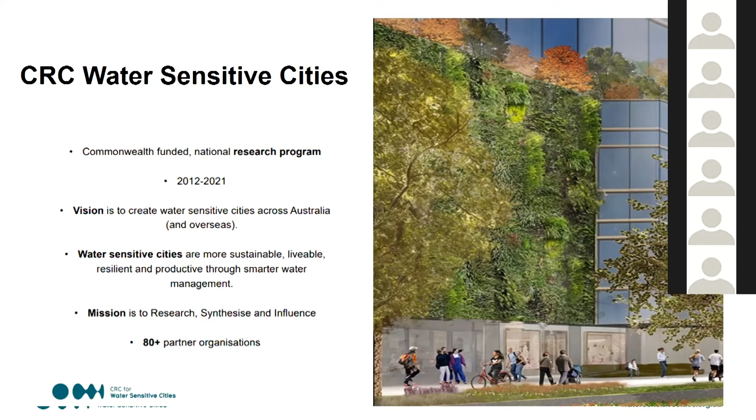Just very quickly, the first 4 or 5 years of the CRC was focused on 4 key thematic areas of research, looking at society-based research around economics, legal factors, behaviour change and social science - quite a progression from a more technical research agenda historically.

Water sensitive urbanism, looking at factors like urban heat, flood resilience, urban planning, the statutory planning environment and ecology. The future technologies, or the blue-green infrastructure as we now know them - water sensitive urban design infrastructure, wastewater management, resource recovery, smart systems and managing decentralised assets.

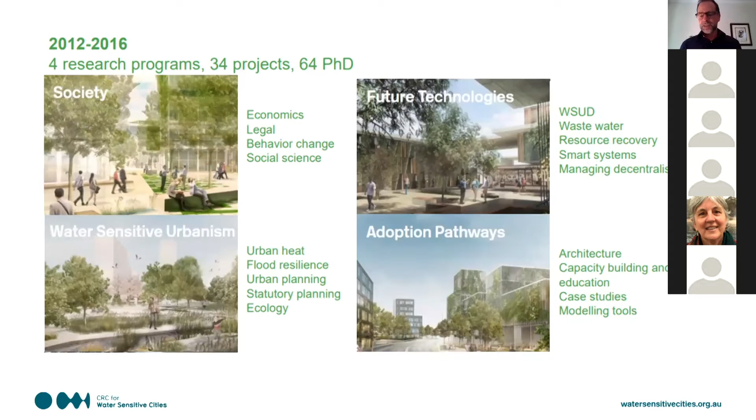And research into the adoption pathways through built form architecture, urban design, the capacity building and education required within industry to implement water sensitive cities futures, case studies and exemplars, and finally the modelling, analytical and diagnostic tools that enable us to make good decisions in respect of water sensitive cities. So that was the foundation research in the first 4 to 5 years of the CRC.

The last 3 to 4 years have really been about integrating the value of that foundation research into useful industry-facing outputs. And that's been done in 6 key areas.

The first one is really answering how water sensitive is your city. This was really about taking the research and embedding it into diagnostic frameworks that enable a city or a region to understand where it's at in its current state in relation to 7 goals and 34 indicators, I believe, of a water sensitive city.

We've developed some economic tools - the absolute importance of being able to understand the economic value, the business case, if you like, of an investment into a water sensitive future. We've looked closely at harmonising better the land use planning and water planning that occurs at various levels of government to get greater synergy and benefit from planning done at regional scales.

We've looked at the infill context of urban growth, which we know is significant in all cities across Australia and internationally, and explored new built form typologies that would produce improved outcomes in respect of water management, urban heat management, livability, and developed frameworks that enable those alternate designs to be evaluated and demonstrated in terms of overall performance.

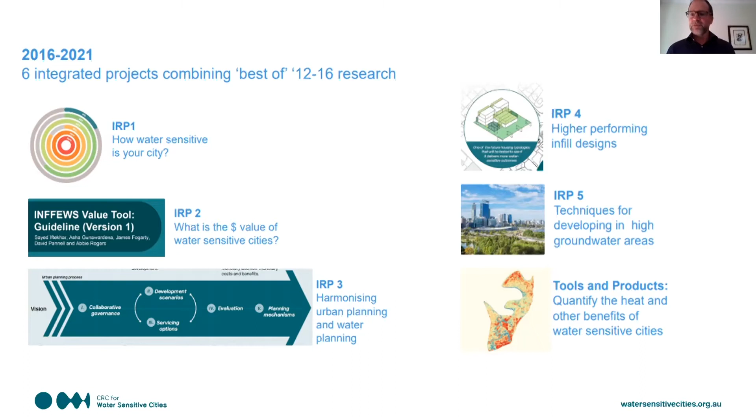And finally, we had a specific program which was all about synthesizing the research into a portfolio, or a suite of tools and guidelines and frameworks, which is what I'll be presenting for you today. So that's a little bit about the CRC.

The main presentation is really about presenting a suite of what we're calling our flagship tools and products. They're all about addressing key challenges facing most cities in Australia and internationally, centred around ongoing population growth, urban intensification, loss of green space, future impacts of climate change, and challenging economic conditions.

As we intensify development and lose green space, and layer on top of that the impacts of climate change, we have a changing urban environment which impacts on our prosperity, livability and resilience, which manifests in various ways. The map on the right shows the heat signature of an intensifying, densifying city, where you can see the green spaces retain their cool signature, whereas the roads and built form are building heat into the cities. As we know in Sydney, and particularly Western Sydney, this has become a very prevalent issue in policy and planning.

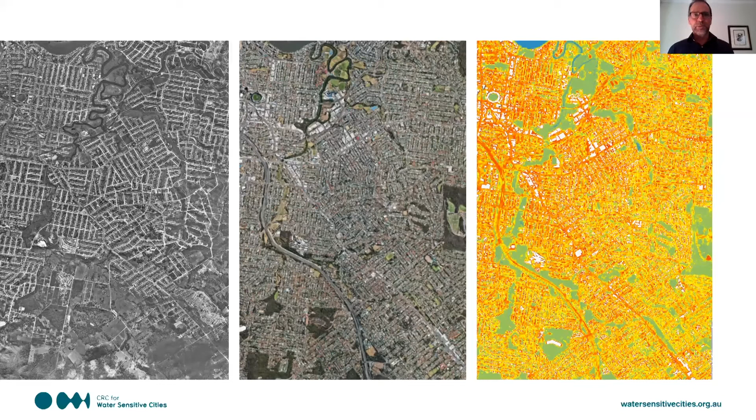So in response to that, community and policymakers are asking for higher level outcomes. They want livability, resilience, sustainability and productivity as an outcome of the growth and development of our cities. And it's in this area that the CRC has focused its efforts and research.

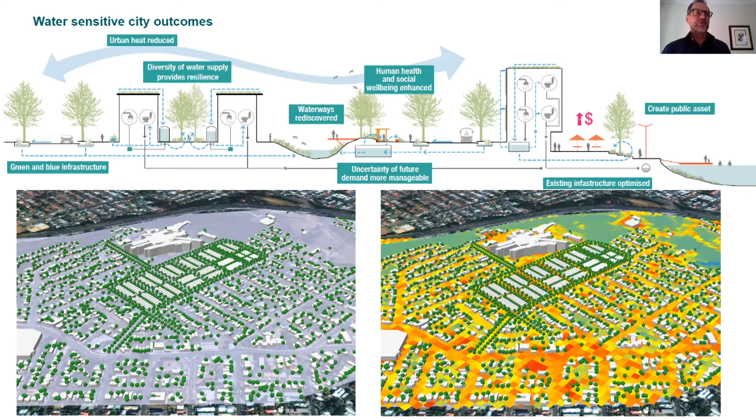A water sensitive city looks quite different to how we have traditionally developed cities and embedded infrastructure to serve them. It's spatially aligned differently. It contains much more open space, green space, much more retention of water at surface in the landscape, and smarter buildings using smarter technology to preserve the resource at source and reuse it effectively under small circular systems. So it's effectively a transition from a traditional linear approach to development and water servicing to a more circular one, with the benefits being more comfortable, livable cities as distinct to hotter, less hospitable cities.

So the tools and products the CRC has developed to help us transition to that more favourable water sensitive cities future are going to be presented now. I'm going to present them in a classic planning continuum, from vision and strategy development as an initial exercise, through to planning and assessment related activities, integrated planning and scenario testing of different built forms and infrastructure solutions, testing those through economic frameworks, down to more detailed design and implementation level support tools, the type of alternate infill development typologies you might consider in the developing middle ring, and the evaluation frameworks that support those, and some tools that help make rapid and smart decisions around investments to protect the natural capital and ecosystems of our urban areas.

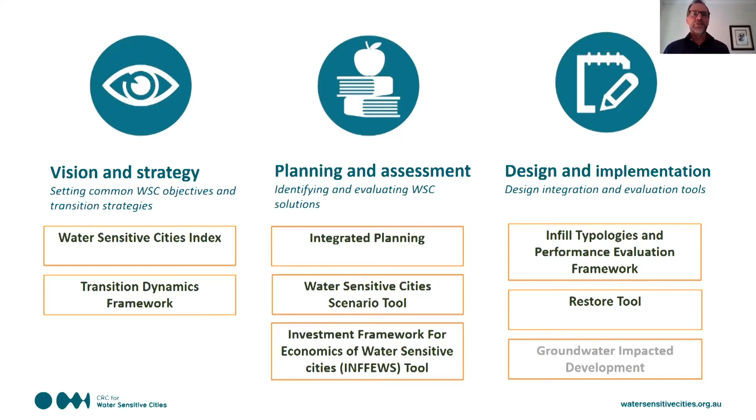So what you see on the screen there is the suite of flagship tools that the CRC has produced. Each one can be used individually for a particular part of the planning process, but ideally they get used as an integrated suite through a complete planning process.

So I'll start with the vision and strategy related tools, and we have two key tools as part of that suite: our Water Sensitive Cities Index, and what's known as the Transition Dynamics Framework. I'll explain each of those in the following slides.

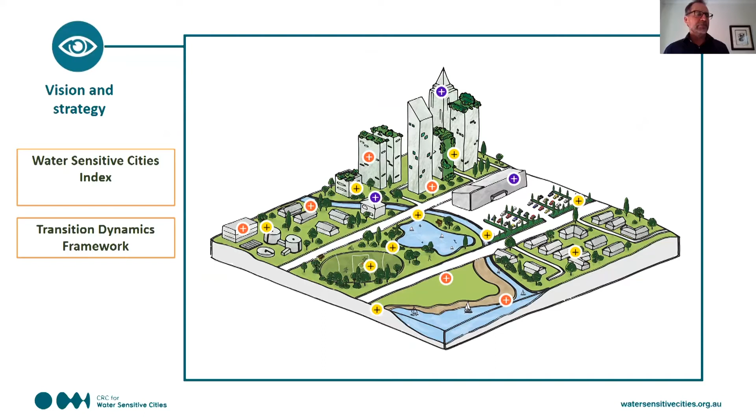In respect of planning a transition to a water sensitive city, the CRC for Water Sensitive Cities has developed a 5-module process which takes participants through a series of deliberative workshops to benchmark the current condition of their city or municipality, to set a shared vision with stakeholders, and to develop strategies and actions. The benefit of bringing a diverse range of stakeholders together through this process is to share knowledge and opportunities across sectors and between people who might not normally work together. So the great power in this process is its collaborative and deliberative nature.

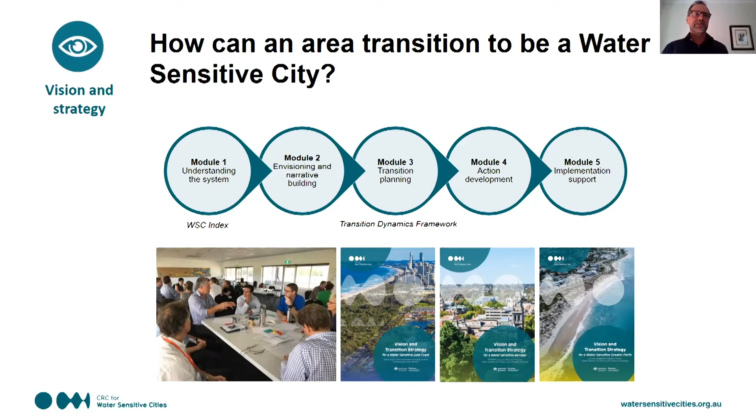An important step in that 5-step process is undertaking this diagnostic benchmarking of where your city or municipality is currently at, using our Water Sensitive Cities Index.

The Water Sensitive Cities Index tool is a web-based tool, and it helps a city get started on their water sensitive cities transition planning process. The tool supports stakeholders to work together to benchmark a city's current water sensitive city performance, using 7 goals to define a water sensitive city and 36 individual indicators within those goals. The benchmarking is based on local knowledge and agreement across many stakeholders through a 1-day facilitated workshop, where the CRC has accredited a range of providers, called index providers, who facilitate and run those workshops.

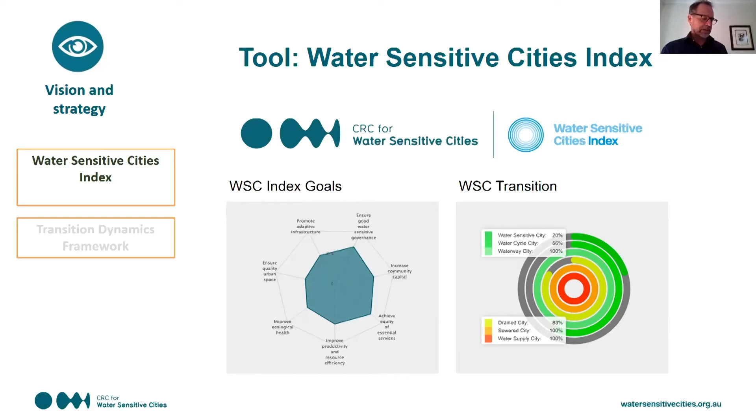Once you've worked out how your city or municipality is performing using the index, and where you want to be in relation to your future aspirations through a vision, the next step is to understand and define what needs to be done to get there. Module 3 of the 5-step transition process uses what we call the Transition Dynamics Framework, which helps determine the strategies and actions that will support a city's water sensitive cities transition.

The framework helps users prioritise areas for strategic action in order to establish the enabling environment for transitions to occur. These include people and champions, platforms for connecting these champions, science and knowledge, demonstration projects, and tools and instruments such as policy and regulation.

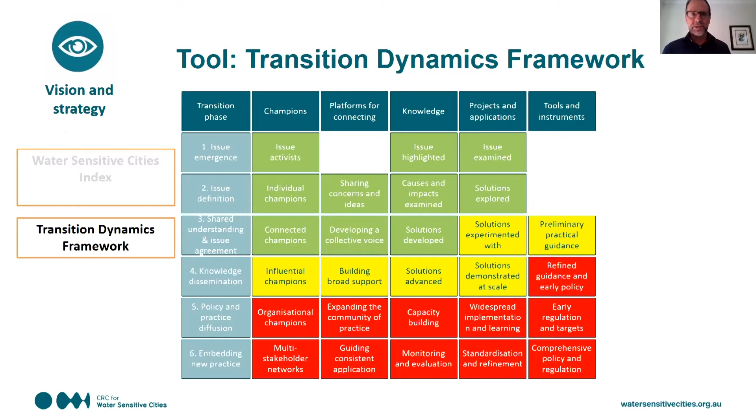As an example, the Water Sensitive City Index process and the Transition Dynamics framework were recently applied with Hornsby Shire Council, and they have their draft Water Sensitive Hornsby strategy, which is out for public comment at the moment and accessible via their website. I'd encourage you all to have a look at it. It's a great record of how that indexing process and the Transition Dynamics Framework process has been done within Hornsby, and the information captured as part of that.

So you can get a sense of what that process might look like if you were to undertake it in your own municipality. Other applications in New South Wales have included Water New South Wales, and municipalities including Blue Mountains, Goulburn, and two or three others.

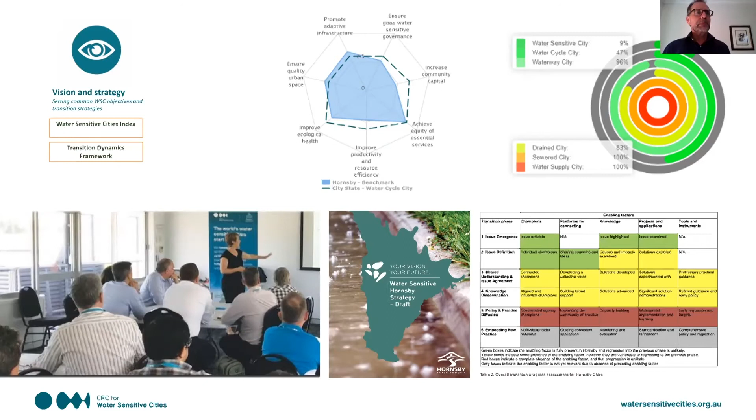So you've seen the Water Sensitive Cities Index and the Transition Dynamics Framework. They're really important tools to help a city position itself to start to really implement actions and deliver on-ground outcomes in relation to the journey towards a water-sensitive future.

The next suite of tools are related to how to start to reflect that vision and aspiration in the decisions made in terms of local planning and the optioneering around different built form and infrastructure solutions that are going to deliver those livability, sustainability and prosperity outcomes.

There are three areas of guidance and tools that the CRC has created. One of those is around informing and providing guidance on how to undertake improved integrated planning, and in particular the integration of water planning and land use planning in that context.

We have the Water Sensitive Cities Scenario Tool, which is a web-based tool that enables very rapid multi-stakeholder gaming or testing of different built form and blue-green infrastructure solutions for a particular location. And we have what's known as the Investment Framework for Economics of Water Sensitive Cities.

Quite a mouthful - the acronym is also quite a mouthful, INFFEWS - but it's effectively a benefit cost analysis tool supported by a very rigorous values tool that quantifies non-market values so they can be confidently included in a cost benefit analysis. So I'll quickly run through what's being provided under each of those.

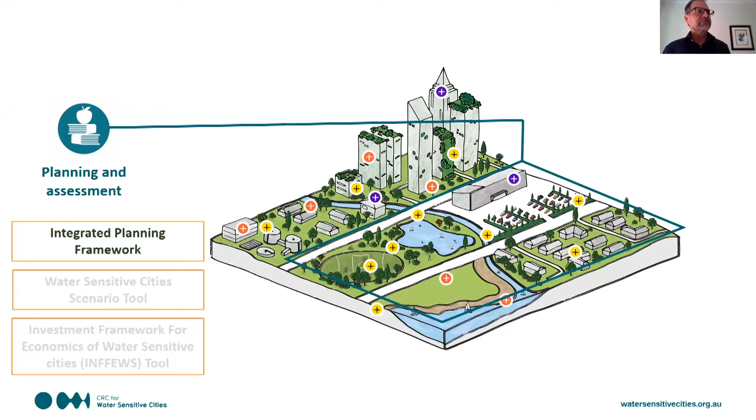In terms of the integrated planning framework, this is still a work in progress for the CRC, and the guidance material will be coming out shortly. The guidance material will be there to assist water sensitive development in different contexts, and will include a conceptual framework, collaborative processes and methods, and strategic guidance on policy, planning and governance arrangements. There will be case studies demonstrating how some of that advice has been reflected at different scales and different urban contexts. So this information is not quite in the public domain yet, but will be arriving in the next few months.

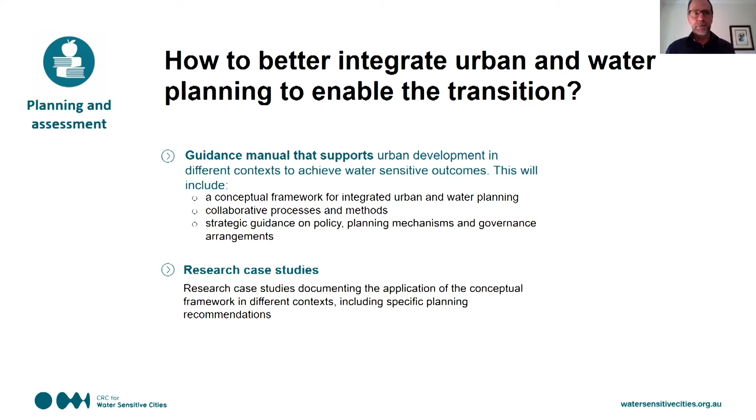In terms of the Water Sensitive Cities Scenario Tool, this is a web-based tool that effectively enables users - and by users, the intent here is this is a tool used as a high-level planning and rapid assessment tool - where you can get multi-stakeholders around the table to game and test the performance of different possible futures.

It enables you to project different future development scenarios, including different densities, different configurations of street block layouts, and proportions of open space to impervious areas, and where you locate green infrastructure, trees, and parklands and the like. From that information, and some climatic information built into the model, it assesses a couple of performance indicators around urban heat and the urban water cycle.

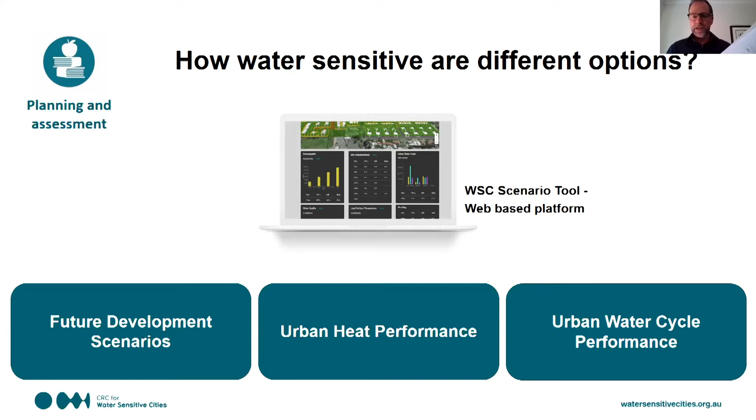So it's a very useful tool to support early strategic land use planning.

As I mentioned, it will look at different urban development forms, so greenfield and infill, and enables you to define within that different typologies through the parameters entered into the model. It also enables you to define where you're placing blue and green infrastructure in the context of that urban layout.

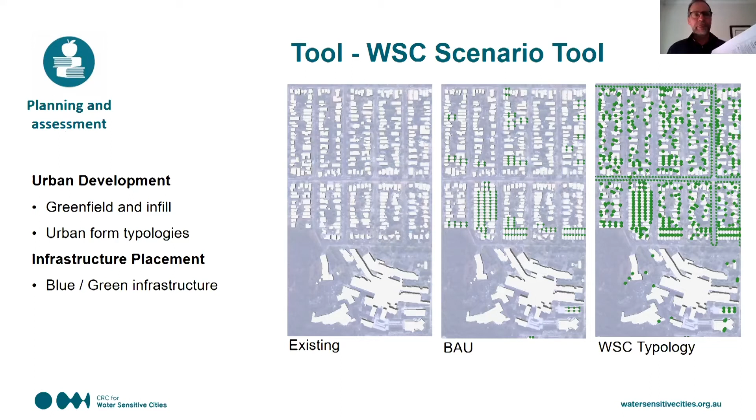Being a web-based tool, it's very graphical, uses a lot of map imagery, and produces a lot of maps that can be exported out into council GIS systems for further analysis and post-processing. In this instance, you can see the massed-up built form of a particular area that you might want to assess and analyse.

Depending on how you inform the model in terms of the application of blue-green infrastructure into that footprint, the model will then assess that and provide information, both in terms of maps and statistics, that give you indicators around land surface temperature, air temperature, and human thermal comfort.

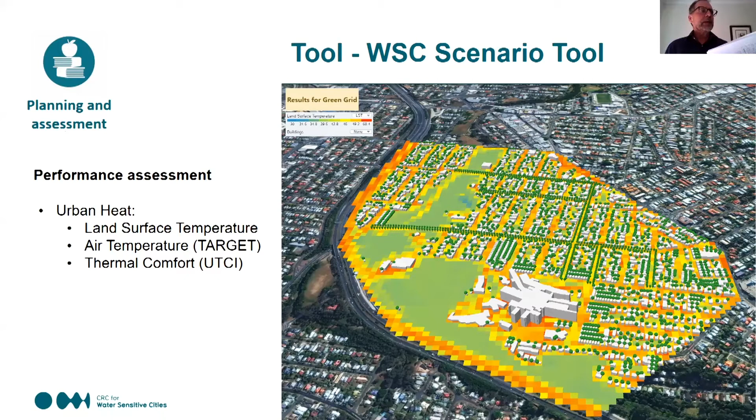Similarly, in that same analysis area, it will do an assessment of the urban water mass balance. And you can look at this at different scales, down to an individual lot, to a neighbourhood, or up to a large precinct or suburb, or even a whole city if you'd like.

What this does is basically map the stocks and flows of water into and out of that particular area of interest, based on a particular integrated water cycle strategy you're wanting to test — which could be combinations of things like rainwater tanks on buildings, precinct stormwater harvesting, wastewater recycling, sewer mining, and the like. You define that strategy in the model, and the model produces the mass balance outcome.

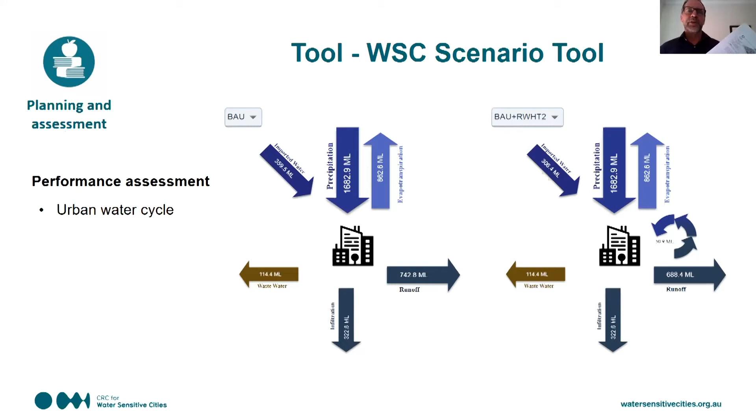Just a couple of examples of recent applications of the scenario tool. We've been doing a process with the City of Townsville in Queensland. The typical process is to first understand what the business-as-usual development trajectory for your area of interest is. In this example, we were looking at what business-as-usual development in Townsville would look like out to 2051.

And the tool, being a geospatial tool, provides a lot of really useful mapping outputs that can inform strategic planning decision-making very early on — not just heat and water cycle.

It looks at overall what's happening in terms of increases or decreases in magnitude against a series of indicators. So the tool can tell you the percentage increase or decrease in tree cover, the potable water being supplied or used within the urban footprint, the overall percentage pervious, and how much population is changing.

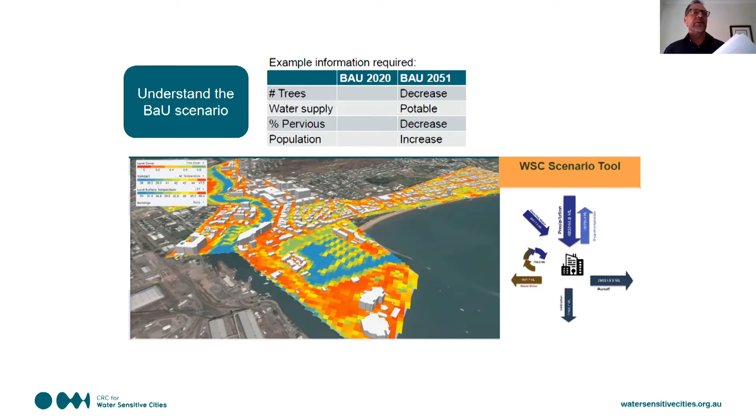So generally you start by analysing a business-as-usual base case, and here are some examples of the exported maps that come out of the scenario tool, which can be imported into a council GIS system.

For Townsville as our example, this map is quickly showing, for the benefit of planners and other decision makers and city officials, how much the impervious fraction of the city is changing in response to future growth over several years.

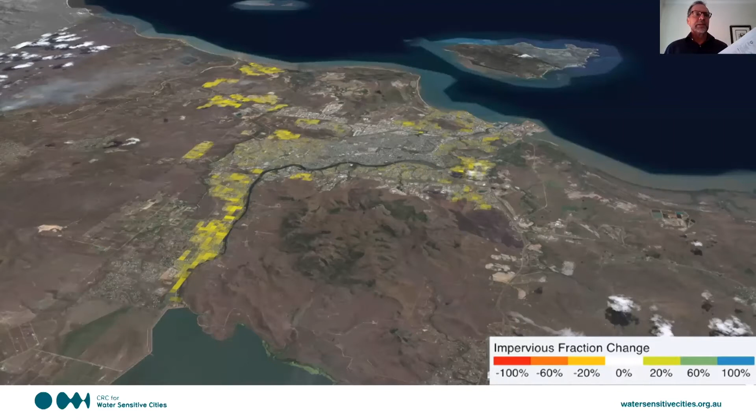Similarly, how much is tree cover changing and where? And how much is temperature or air temperature changing and where?

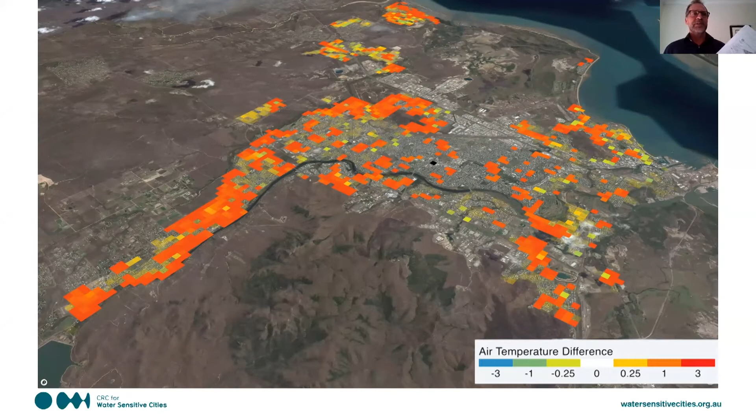This sort of spatial mapping is very powerful to help inform decisions around land use planning in particular, and it can inform where you might locate future density in relation to certain areas of heat and heat vulnerability risk, or other water cycle risks such as flooding.

Beyond analysing your business-as-usual development base case as your comparison point, the tool then enables you to game and test a whole lot of different built form typologies and blue-green infrastructure typologies at different scales.

These slides give rapid examples of looking at different scenarios at different scales, analysing the outputs from those in terms of land cover, water balance, and heat. In a process of looking at how different scenarios work at different scales and then aggregating those up to your municipal or city scale, you can get a picture as to whether you've got your planning and policy settings right, and whether you've got the guidelines directing how development occurs right.

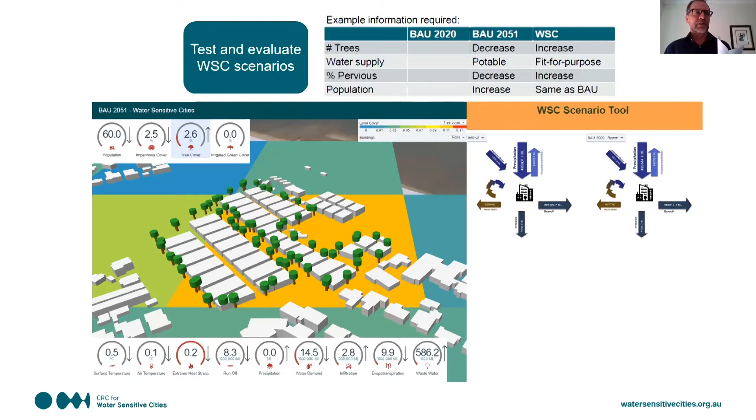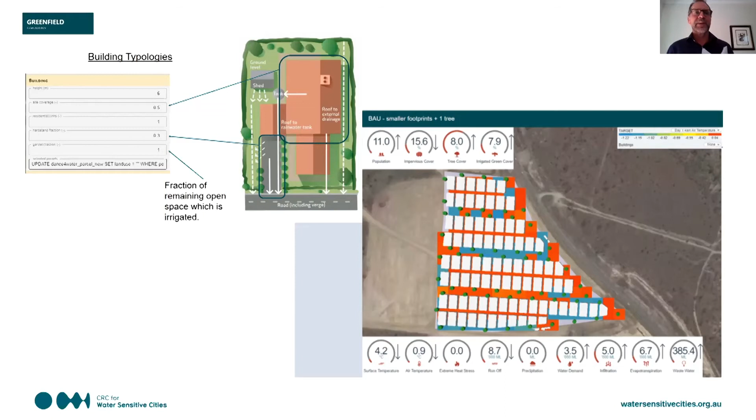So a few more examples, a very basic example of a small greenfield area. The model enables you to define down to individual lot levels what the characteristics of a site are in terms of site cover, levels of imperviousness, where trees are placed, and so on. It uses that information to run its algorithms to generate outputs of water balance and heat indicators.

So you've got a sense there of what the scenario tool's all about. It's a very novel and new tool in the market that enables urban form, water cycle and urban heat outcomes to be rapidly evaluated at a conceptual level.

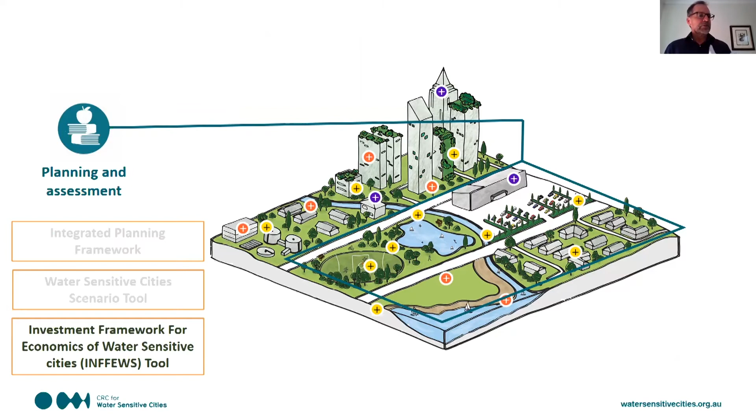The INFFEWS tool, the Investment Framework for Economics of Water Sensitive Cities, is really about building the business case, the cost benefit of investments, and using this as a mechanism to get confident investment into those solutions.

It's a very traditional cost benefit analysis tool, but it's been tailored and nuanced to be very useful for rapidly assessing water sensitive city type projects. Whilst it can be used for non-water sensitive city applications as a BCA tool, it's got a lot of inbuilt features that make it particularly efficient for assessing water sensitive city projects.

So the BCA tool component, which is a spreadsheet, so it's very accessible, effectively has three main sources of information that feed it: what are you doing, where and how?

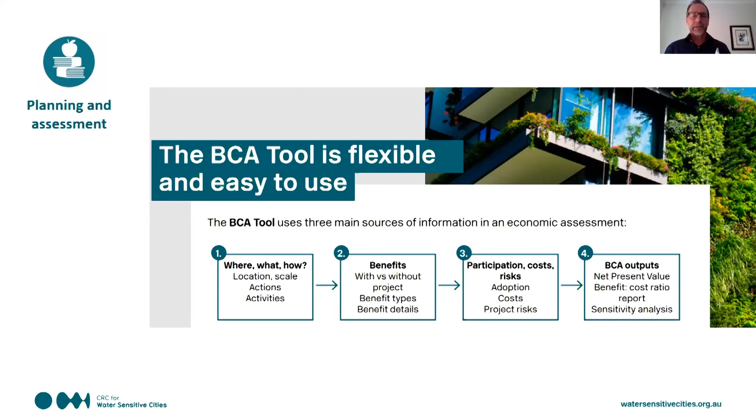Some of the features of Value Tool are that it's a comprehensive list that's up to date and related to water sensitive cities in Australia.

The Values Tool uses filters and search functions that make it very easy to narrow down on relevant benefit values for your particular analysis. It classifies benefit values in a range of ways to help identify which ones are relevant and provides supporting information in making those choices. It has all of the values listed with web links and citations to the original resources.

And it indicates a level of robustness of the original study that those values have been taken from. So you've got all that information captured in that one single database, which is a significant value and new tool.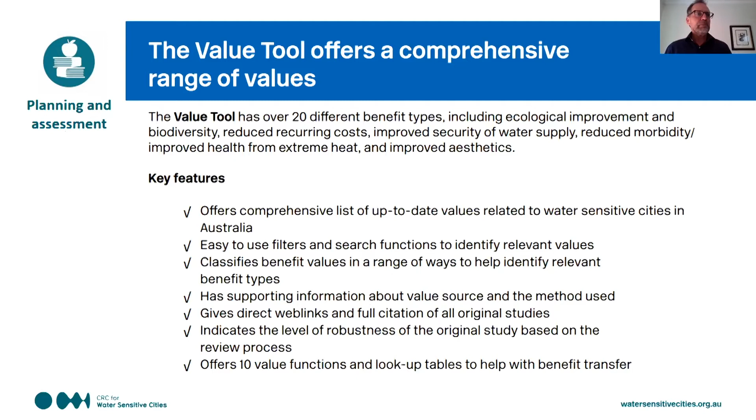Effectively, what it does is enable, again in a multi-stakeholder deliberative process, very rapid assessment of different water sensitive city project options and quickly identify the list of benefits that are going to accrue from those potential strategies or solutions, the costs associated, and enables you to graphically represent those in ways that make it very clear where the benefits are accruing and in what areas, and how the benefits relate to costs and whether you are in fact a feasible and viable investment.

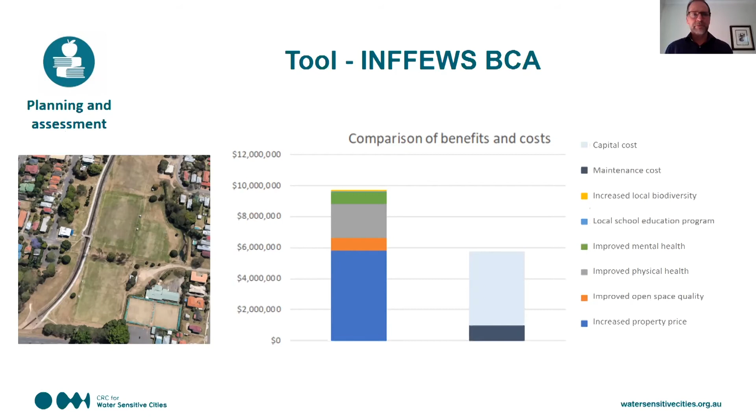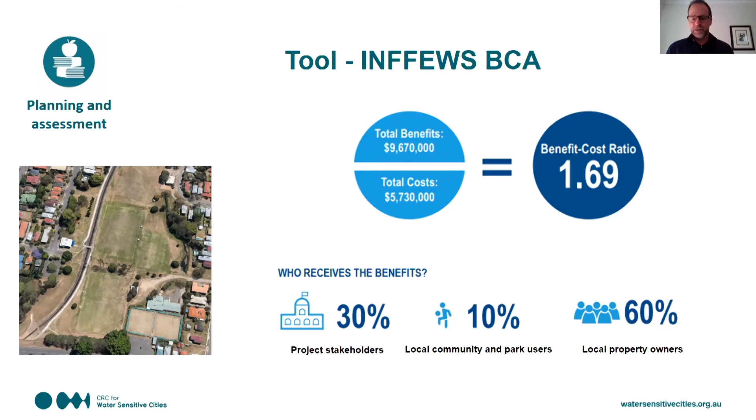And that can be post-processed in various ways to communicate to investors, elected officials, or community and residents the value of individual projects - the total benefit value, the total cost value, the BCR, who receives the benefit, and who pays the cost. So a very useful tool to make sure that beyond just having good ideas and good strategy and good planning.

That you've got the evidence-based information to be able to support confident investment into solutions on the ground.

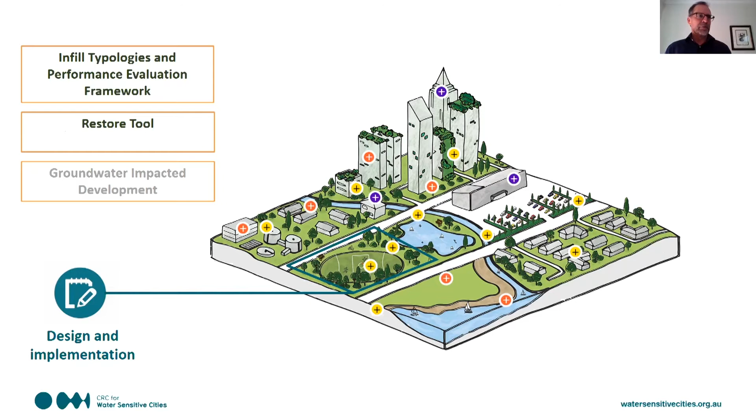So the next phase of tools is really down at providing more specific advice and guidance and frameworks around solutions at local scales. The two tools I'll quickly talk to are the infill typologies and performance evaluation framework, and finally the Restore tool.

So for infill development for water sensitive urban design, there are two basic products the CRC has developed. An infill typologies catalogue is a range of possibilities and ideas conceived from an architectural perspective around different ways to configure and lay out sites, and to imagine the built form to effectively provide more pervious space within infill development areas, while maintaining and protecting the desire to achieve certain population densities, and having those building typologies deliver benefits in relation to water balance, heat mitigation, and overall livability and aesthetics.

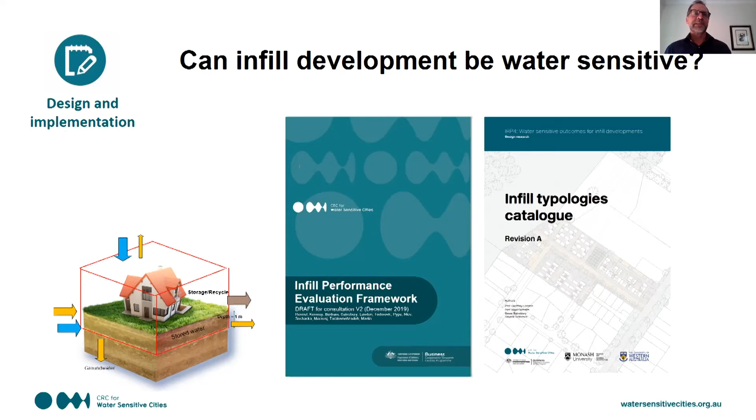The infill typologies catalogue is a great resource for architects, urban designers and planners who might want to seek inspiration from that information and adapt the thinking and ideas to their local context. The infill performance evaluation framework enables infill typologies to be evaluated to assess their performance against a series of key indicators, which I'll show on the next page.

You can see on the right-hand side a couple of images showing an existing configuration on a site redeveloped in a traditional business-as-usual way of infilling that area, probably a high imperviousness example in the middle, and a water sensitive infill typology variant on the right-hand side. Evaluating those through the evaluation framework enables you to assess the performance.

You can see the spider diagram on the left-hand side with a series of indicators: dwelling amenity, outdoor private space, outdoor communal space, outdoor public space. These are subjective value assessments, along with water efficiency, stormwater runoff, and urban heat outcomes.

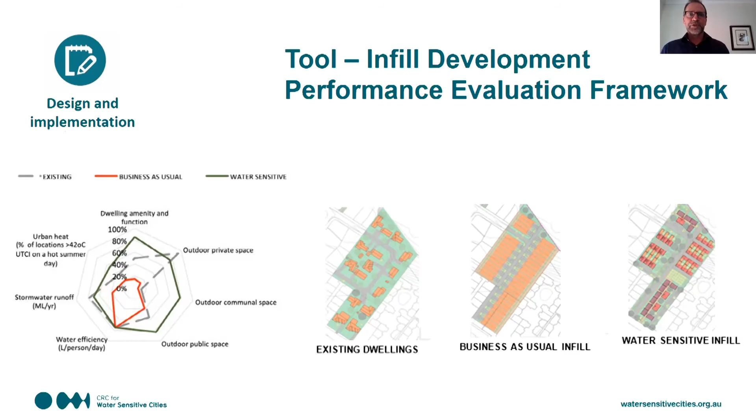So these tools enable you, as a proponent, to look at alternatives and put a strong evidence-based business case to a local council or regulator. Or conversely, a municipality might want to use these tools to look at how to adjust planning provisions to achieve the community aspirations and outcomes you want for your city in relation to water cycle and urban heat metrics.

The final tool I'll touch on is called the Restore tool. Restore is a tool to help make very rapid decisions on how best to invest in ecological management and recovery of urban streams and waterways.

The Restore tool is also a spreadsheet-based tool, and it poses a series of questions which a collection of local stakeholders knowledgeable about the local ecosystems and water environment can answer rapidly based on local and tacit knowledge, rather than having to do extensive analytical and modelling work.

As an outcome of applying the tool, it's geared towards creating a mechanism to get consensus quickly on where best to place your investment when it comes to restoring ecosystem services, values and functions within urban waterways. It looks at a whole series of indicator areas, from hydrology, geomorphology, ecological connectivity, both longitudinally and laterally, riparian condition...

...chemical water quality, nutrients, and biota. Based on the knowledge and input from local experts, it enables you to rate and prioritise where you should place your investment for a particular stream context.

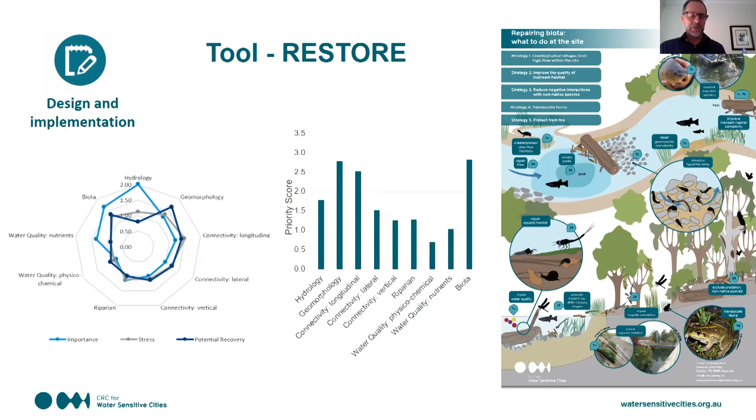Supporting those software tools is a series of guidelines developed by the CRC, and I've just listed not all of them here. Indeed, there are more than 2,000 pieces of IP created by the CRC that are all accessible through the CRC's website, but here's a small snapshot for the purpose of today.

In terms of vision and planning level work, there's good guidance for engaging communities in water-sensitive city transitions. In terms of economic analysis, there's good documentation of different applied examples and case studies of the application of the INFFEWS tool to different contexts and scales, and guidance on how to construct a compelling business case for water-sensitive investments.

Down at the design and implementation level, there are specific technical guidelines in relation to green treatment technologies, biofilter systems, and guidance on designing for a cool city—designing for passively irrigated landscapes and trees for a cool city, guidelines for optimised tree placement, and the like.

As I say, this is not an exhaustive list, but access the CRC's website and you'll be able to search your way through and find a whole plethora of useful guidance and practice notes for industry.

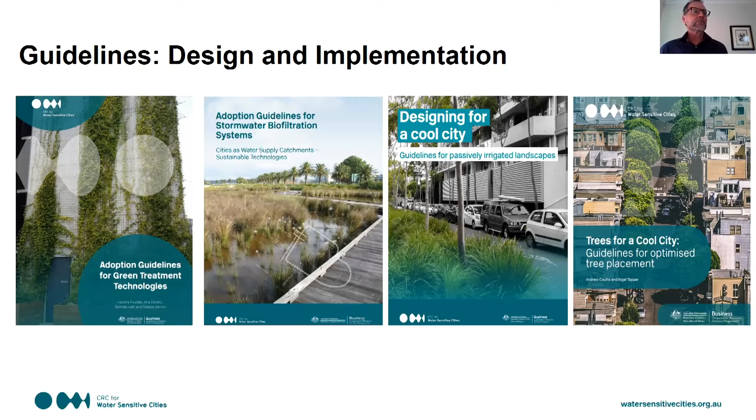So in summary, the CRC tools and guides help us deliver water-sensitive city outcomes by addressing key gaps and issues. They help provide the evidence and frameworks required to move us away from business as usual. They support collaboration and communication across multiple stakeholders, and are mostly deliberative tools to be applied within multi-stakeholder forums. They're all underpinned by robust solutions and research, so years of research underpins the tools, which provides confidence for users in their application.

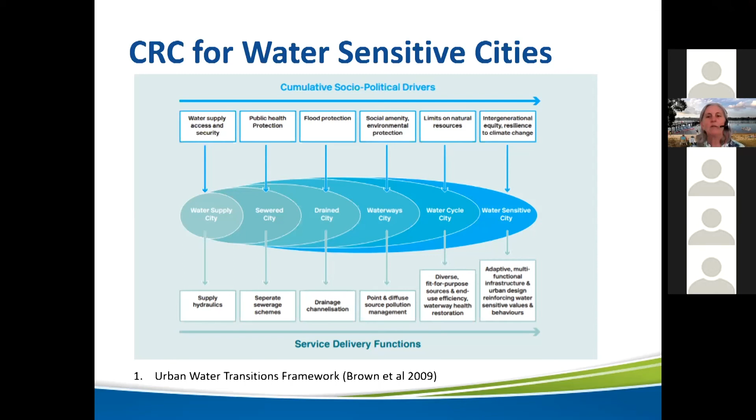All councils are at different stages in their journeys towards a water sensitive city, so these kinds of tools and collaborative approaches really help make that happen, especially when we're adapting to climate change. We're trying to build resilience against stresses and shocks from environmental disasters, economic downturns, and now this COVID pandemic. So it's really important that we continue this journey towards water sensitive cities.

As Malcolm also said, the value to councils is that it's evidence-based. We're always stretched for funding, and we need to make our dollar go further. We need to do it collaboratively, because working in silos doesn't work. We need an integrated, collaborative approach where we bring all our stakeholders together, and these tools really help us to do that. The consultants trained in them are fantastic. It's place-based and placemaking, and the cost-benefit analysis tool really does help you make that business case.

All the tools are scalable, so you could use them at a subcatchment level, a precinct level, a town, a city, or a region. The case studies are really excellent tools because they show you how things have been implemented, and they provide contact details of people. So if there's not enough information, you can pick up the phone and ring someone who's done it before and get good word of mouth advice. I think the main message is that these tools are adaptive.

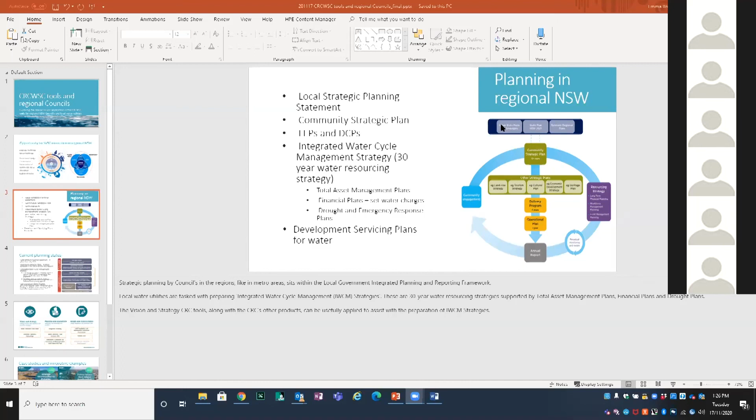Okay, how was that? Yes, that's it. Okay, great. Can you see the full screen? No, yeah, oh yes, now. Yep, okay, so just some context around planning in the regions.

This follows the integrated planning and reporting framework set by local government for all councils across the state. Local water utilities are tasked with preparing integrated water cycle management strategies. These are 30-year water resourcing strategies, supported by total asset management plans, financial plans, and drought plans.

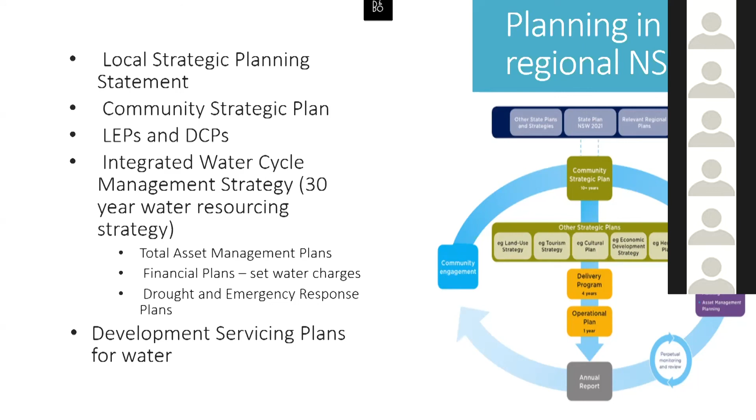This picture to the right shows the water planning context in regional New South Wales. Currently there are 8 IWCMs formally in place across the 92 local water utilities, and 59 have applied for state government funding support to prepare those. So there's a large tranche of effort underway that can be usefully assisted by drawing on CRC tools, guidelines, and case studies to drive water sensitive outcomes for regional communities.

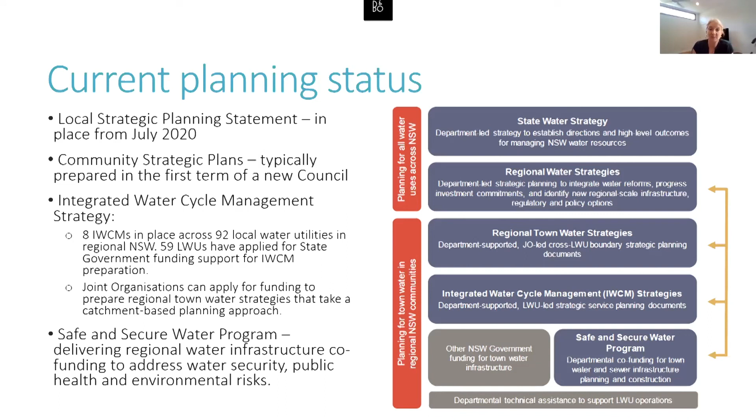Joint organisations can also apply for funding to prepare regional town water strategies that take a catchment-based planning approach. So just to recap, the CRC tools cover the functions across the water sensitive city transition framework that Malcolm and Nell outlined, and they provide a means to plan blue, green and other infrastructure in an integrated way and develop business cases that take into account the multiple benefits of water in the landscape.

We note there's varying capacity across the regions, and all councils are at different stages in the development of their place-based planning and water-sensitive town transitions. So all of the CRC products - the tools, case studies, guidelines produced by the CRC - can assist with ongoing support to progress along this transition more effectively and benchmark along that journey.

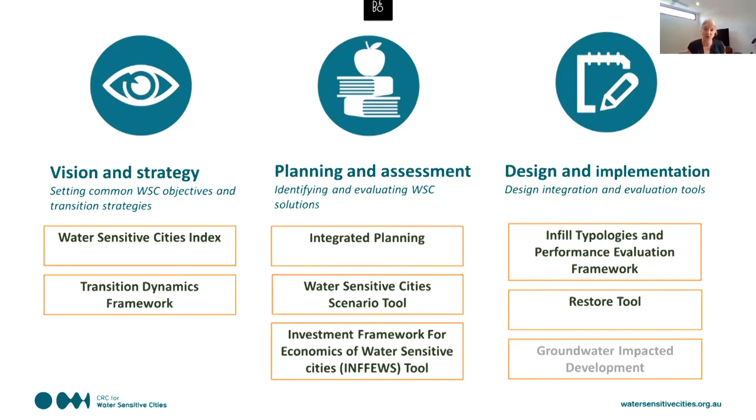So there's some great examples out there in the regions. The CRC has worked with Orange, Dubbo and Goulburn. There's case studies available on Orange and Dubbo, but there's definitely lots of opportunity for more. Recycling is getting increasing attention in the regions, and there's increasing uptake of smart meters in Dubbo, Central Darling, Golden Fields. So we'd love to hear from councils about the work they are doing in this space, as we want to showcase work for the CRC's upcoming national conference in March next year.

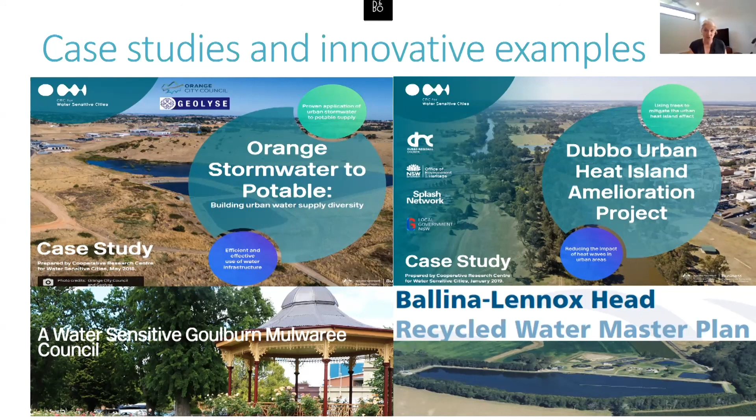So what's next? Please attend these webinar series. You can contact us - please contact Beth and Nell and myself. Check out the websites, there's so many resources available on those. I'll now hand back to Beth to give an overview of the upcoming webinars. Thanks, everyone.

Can you stop sharing your screen, please? There we go. I'll go back to sharing mine.

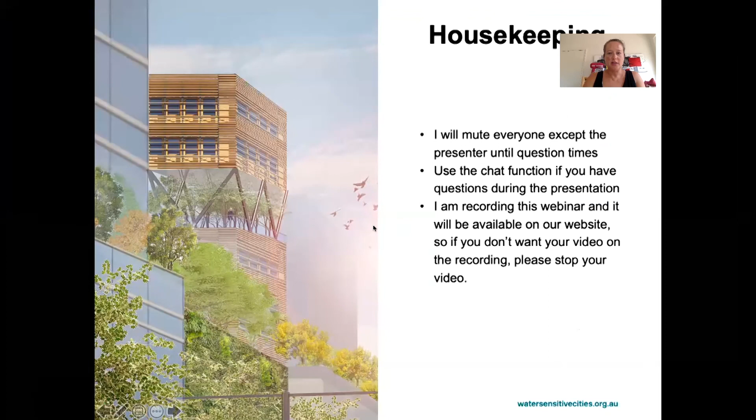As I think most of you are aware, this is going to be a series of webinars. There's 5 altogether, including today's. Today's was very much an overview of the CRC and more of an introduction for people who haven't really been involved in the CRC up until now. Hopefully for those people have a better understanding of what the CRC has been up to and how some of the tools and guidelines can help achieve what you're trying to do at your council. And for those of you who have been involved in the CRC for a little while, this was probably a little bit boring for you because you know all this stuff already.

The one on the 1st of December is only case studies, so hopefully we'll have about 4 case studies throughout New South Wales, regional as well as metro examples. Then on the 8th of December, we have some presentations around the street tree guidelines. And the last one before Christmas will be the INFFEWS tool, which is the benefit cost analysis tool, if you remember from Malcolm's presentation. So if you have any questions or anything like that, please feel free to email me.